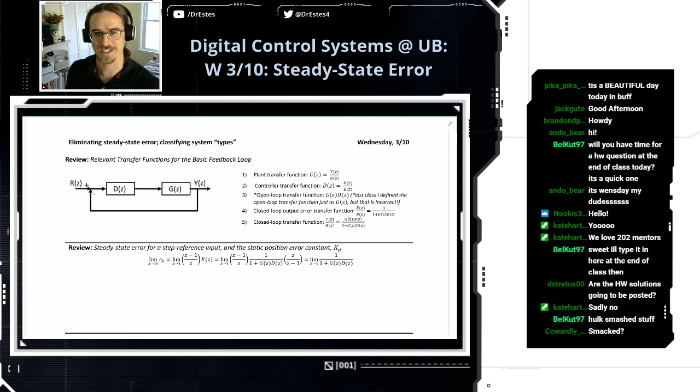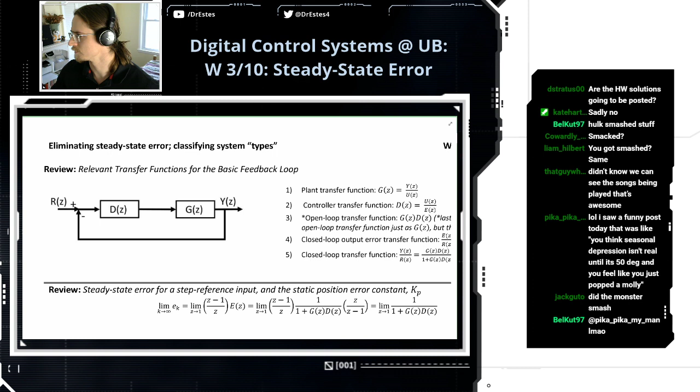I do appreciate you guys. Alright. I saw a funny post today that was like, you think seasonal depression isn't real until it's 50 degrees and you feel like... yeah, you can tell, like, just the sun coming out, it makes a huge difference for your mood. Oh my gosh, it's true. Is this the same sheet from Monday? It's different, the top of it is the same, but it's gonna change. Literally, I'm out there like a dog sniffing the wind.

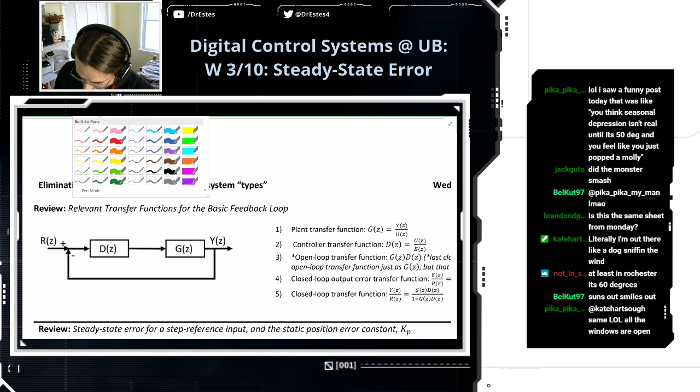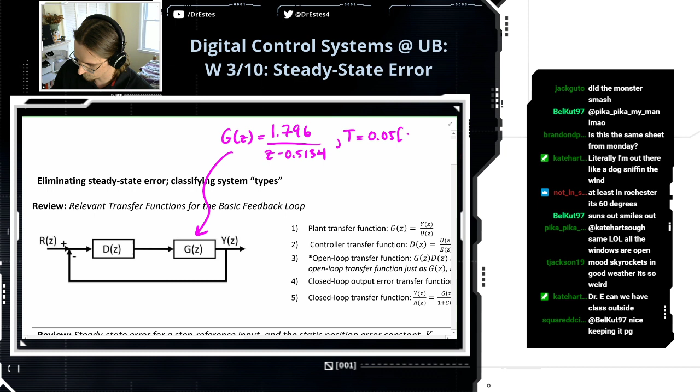Okay, let's review a little bit to catch up on where we are. So we're doing control of a DC motor, and we have our feedback diagram, and this is our model for the motor. This is our transfer function in the Z domain. A transfer function in the Z domain, you have to give the associated sample period with it. And then we came up with a controller that eliminates steady state error. It looks like this: it's got a control gain in the numerator, and then Z minus 1 in the denominator.

Ando says, I just realized I can open my window. It's such a nice day out there.

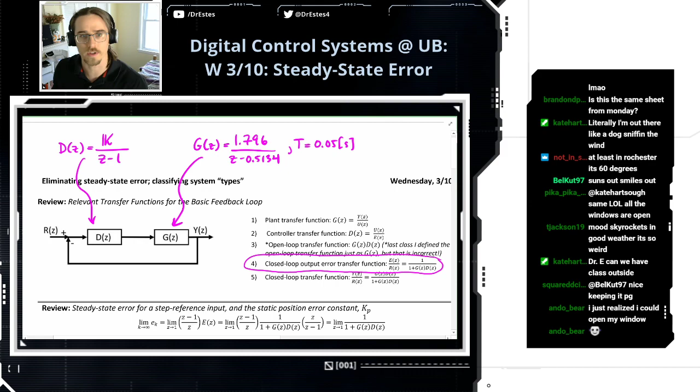Okay, and just to summarize, if you look at transfer function number 4 here, it's called the closed loop output error transfer function. Basically, it's about the dynamics of our error over time. And what we found out is this, and this is how we came up with our controller. But if the product G of Z and D of Z, so this is called our open loop transfer function, if this has a pole at Z equals 1, the steady state error for a step reference is going to be 0.

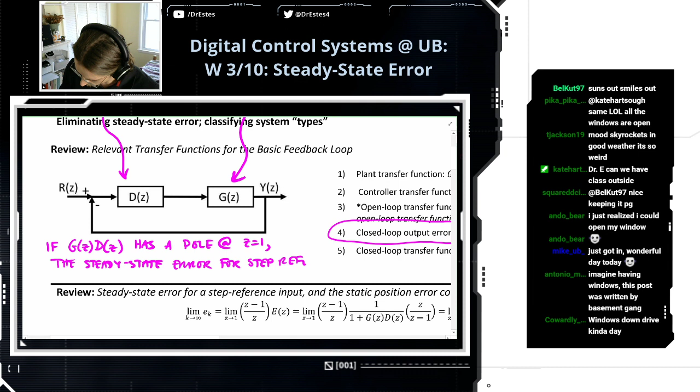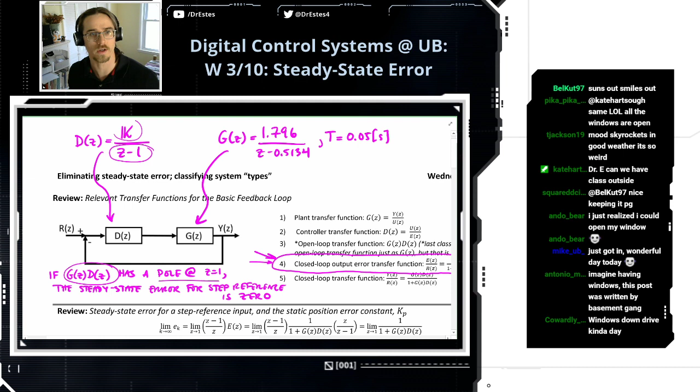So we found this out by applying the final value theorem to transfer function number 4 over here. So we came up with this result: we have to have a pole at z equals 1. So the open loop transfer function has to have a pole at z equals 1. The way we did that is we took our controller transfer function and we just added a pole at z equals 1. Alright.

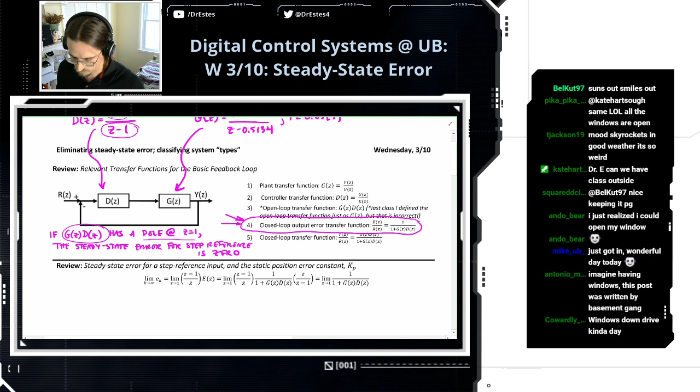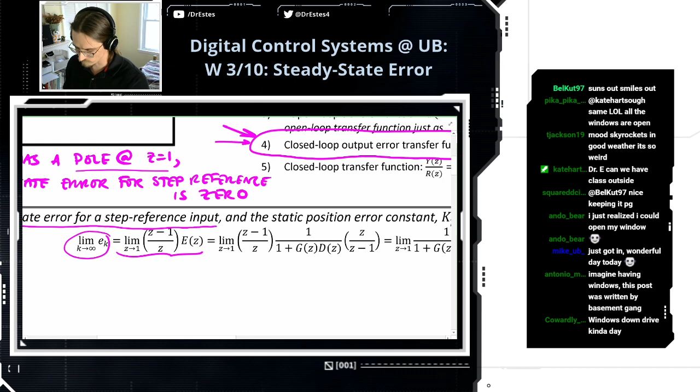Okay, just a little more review here. Let's show how this mathematically happens. So right here is the steady state error for a step reference. This is the limit of the error as k goes to infinity. This right here is just final value theorem. And if you follow through the math, you get this: the limit of z approaches 1 over here. And we made a definition just to kind of simplify this.

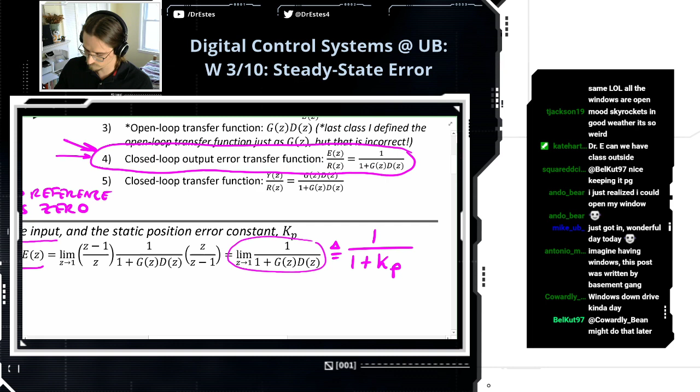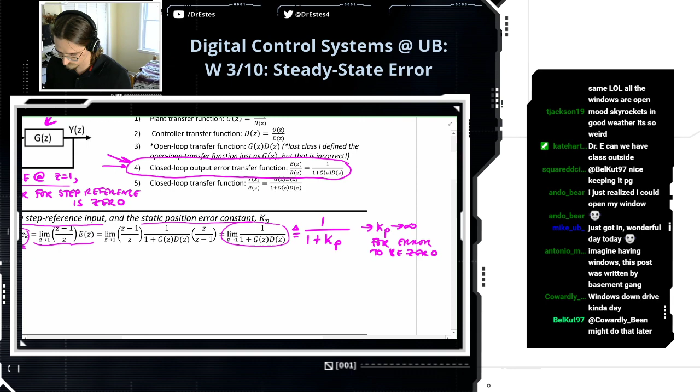So we call this 1 over 1 plus kp. Kp is called the static position error constant. And if this expression is equal to our steady state error, if we want the error to go to 0, then kp has to go to infinity. And if you compare these two expressions right here, kp is the limit as z approaches 1 of g of z times d of z.

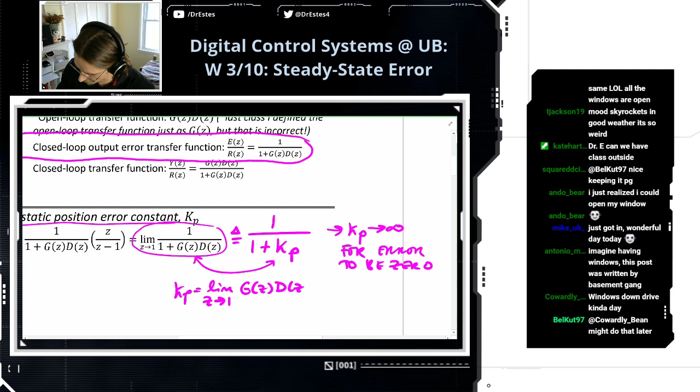So why don't we calculate this for our motor and just demonstrate once again that this goes to infinity. So we're going to say kp is the limit as z approaches 1 of g of z times d of z, which is, this is g of z, 1.746 over z minus 0.5134. And then this is our controller d of z. And you can see here, if I plug in 1 right here, that denominator is going to go to 0. And this is indeed going to go to infinity.

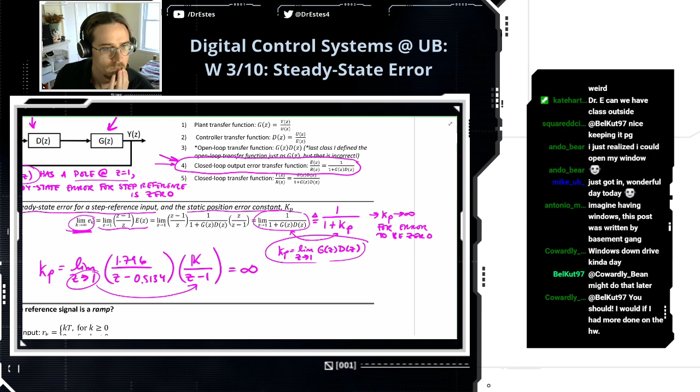Okay, so where we left off, we added this controller and picked a gain. I think I liked this one, I can't remember.

Let's plug it in and take a peek at it, and then we're going to try another type of reference signal. We're going to try a ramp.

Okay, it's the mega. Get the port correct. Upload this.

Wait, is everything plugged in? What's going on?

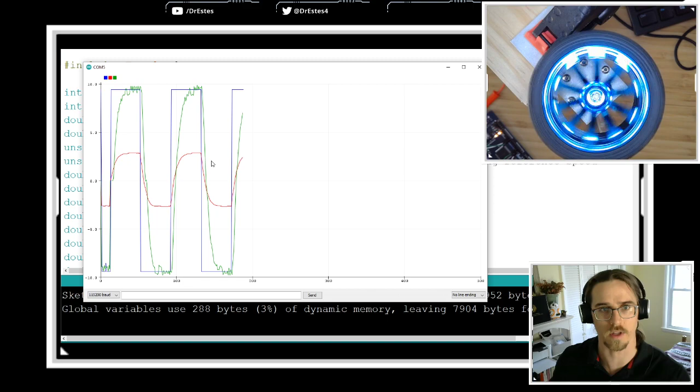Okay, so the green line is the angular velocity of the motor. The blue line is the reference angular velocity. So this controller is giving us zero steady state error.

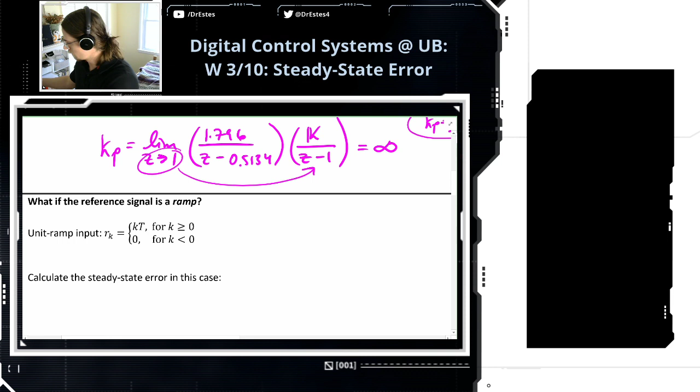Okay, so now what if the reference signal is a ramp? This is what a unit ramp input is defined as: it's k times t for k greater than or equal to 0, and it's 0 before.

Loose connections are the main cause of the biggest headaches in the entire universe. Yes, I agree, especially today.

Okay, so we're going to plot r of k as a function of k, at k equals 0, 1, 2, 3. So at 0, r of k is going to be 0. At k equals 1, r of k is going to be t, because it's k times t. And then at k equals 2, we're going to be at 2t, and it just goes on in this linear fashion, and that's why we call it a ramp.

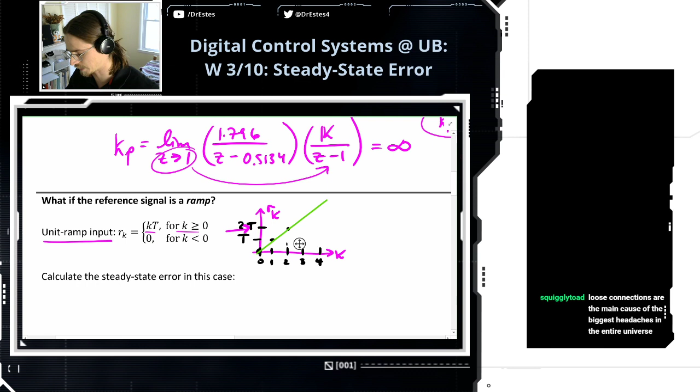So this is the reference we're going to try next, and we're going to try to look at the error as we're tracking this ramp.

So let's draw what our motor is most likely going to do if it works. It's going to try to track the green line. But if there's some steady state error, it'll never totally catch up with it. Our goal is to precisely follow that green line, but spoiler, we're going to have a little bit of error. But we're going to talk about how you could get rid of it as well.

Forgive me. I forgive you, T. Jackson, I forgive you. But what are the effects of choosing a different gain?

The effect of choosing a different gain moves around the closed loop poles. Actually, I'll pull this up really quick.

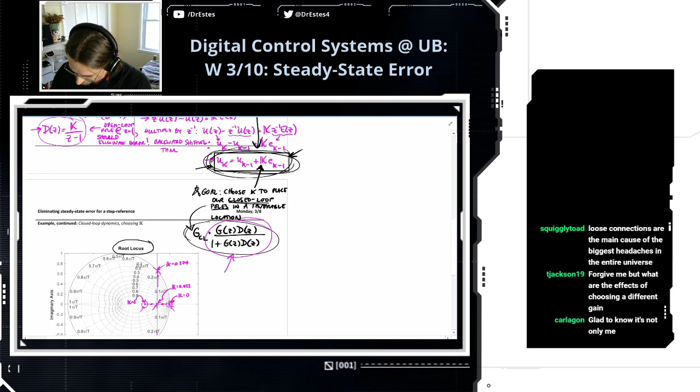So what we did at the end of last class is a root locus plot, showing where the closed loop poles for your system go as you change the gain, k. When the gain was 0, we had 2 poles, one here and the other one here. When we chose the gain to be 0.033, both of our poles coincide right here on the real axis. So changing your gain moves around the poles, and depending on their location, you can have overshoot, different settling times, whatever. So that's what that does.

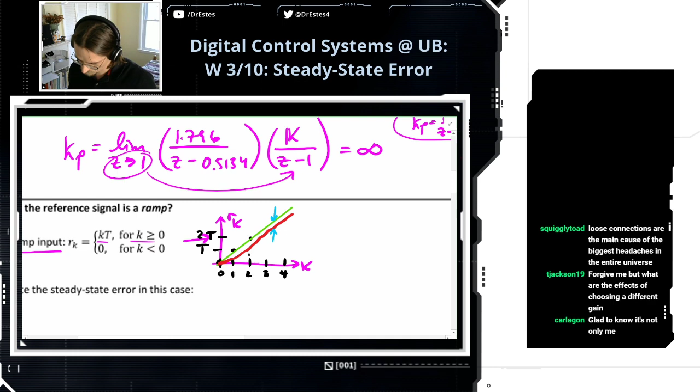Okay, so we're going to need to take the z transform of this ramp input, because we're going to use the final value theorem. So if I take the z transform of this ramp, this is what you get: it's t times z over z minus 1 squared. So we're going to use this in a second.

All right, so now we're going to calculate the steady state error. The steady state error is the limit as k goes to infinity of our error, ek. And this is the final value theorem right here, which just says that you can calculate this error by taking the limit as z goes to 1 of z minus 1 over z times your error in the z domain.

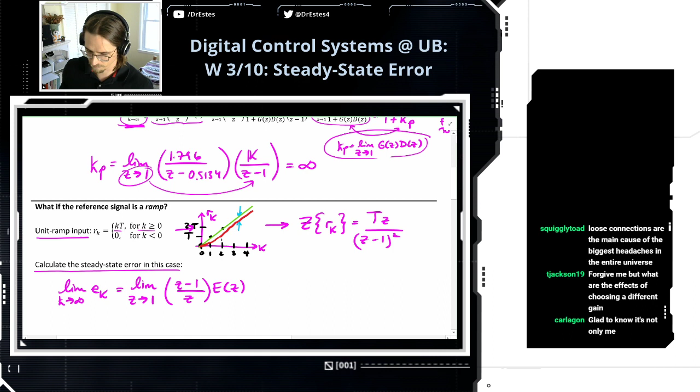Okay, so we'll keep working this out. The limit as z goes to 1 of z minus 1 over z. So our error in the z domain, we're going to use our transfer function number 4 up here.

Up there, which you can't really see. But it's e of z over r of z is 1 over 1 plus g of z d of z. Actually, I'm just going to write it like this first: we're going to take that transfer function, and then we're going to multiply it by r of z.

And this is r of z, by the way—the z transform of our input. That transform is from last week when we were doing some magic, right? Yes, that's correct. That's just one that we're going to use, and its origins are magical.

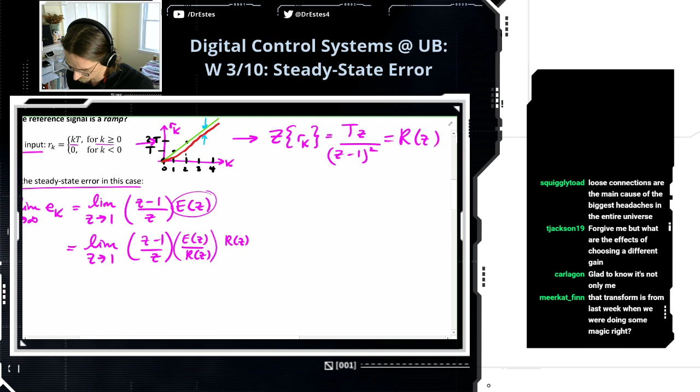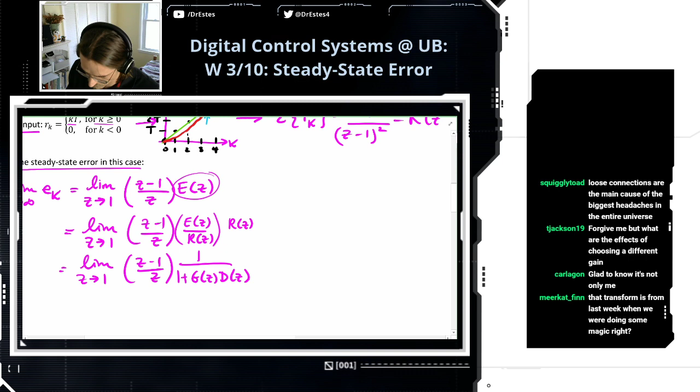So let's keep writing this thing. E of z over r of z is 1 over 1 plus g of z d of z. And then for r of z, we're going to substitute tz over z minus 1 squared. Some things are going to cancel out here, fortunately, like this z can cancel with this z, and this z minus 1 can cancel with one of these z minus 1s, because that's a z minus 1 squared. And then we're left with 1 over 1 plus g of z d of z times t over z minus 1.

Here we're going to introduce another definition. This, by definition, is equal to 1 over kv. So that just means, if you examine those two lines, kv must be equal to the limit as z approaches 1 of 1 plus g of z d of z, times z minus 1 over t. We just define this term to simplify this expression a little bit, so we don't have to write the whole thing out all the time. We'll just write it as 1 over kv.

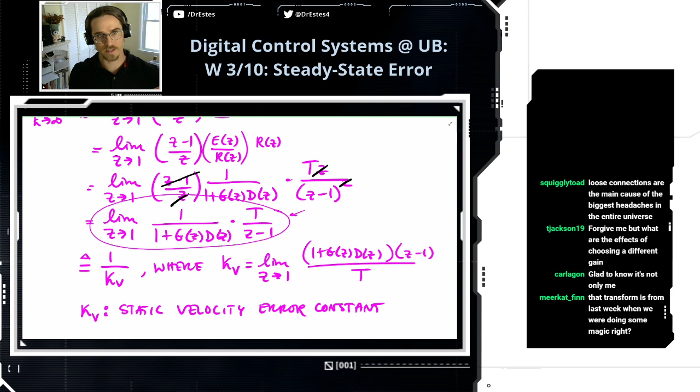So we're actually going to have multiple types of performance constraints that we work with, like settling time, overshoot, rise time—those are called transient performance specifications. But these static velocity, static position constraints have to do with the error as time goes to infinity. So we call those steady state performance constraints.

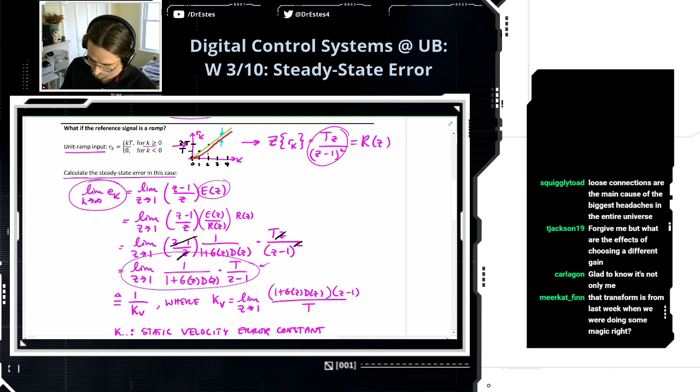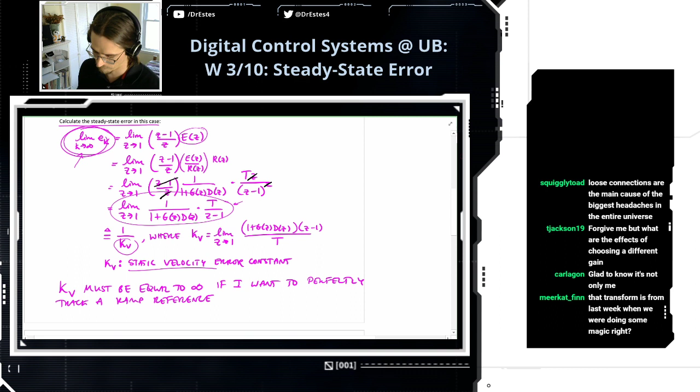Okay, so we'll just point out one thing here. If I'm trying to track a ramp reference like this, and if I want the error to go to 0, so if I want to finally line up with that green line, then kV must be equal to infinity if I want to perfectly track a ramp reference, because the error is equal to 1 over kv. So if I want the error to go to 0, I need to be dividing by infinity to drive that to 0. And this is going to be pretty easy to remember because remember, kp must be infinite to perfectly track a step reference—at least at steady state. Like at steady state you approach, you have 0 error.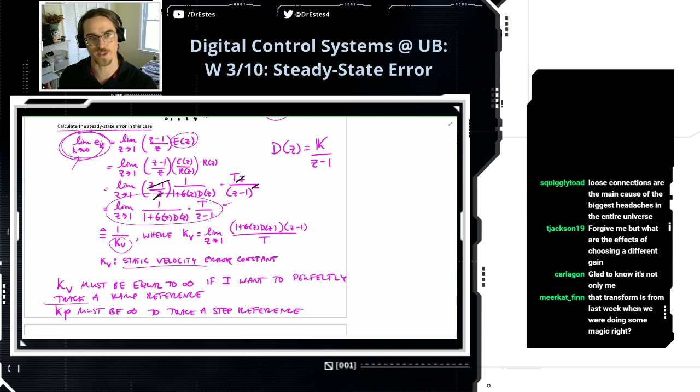Okay, so what I want to do right now is use our existing controller for the DC motor, which is this: d of z is just k over z minus 1. That's what we're working with right now. I want to calculate what the steady state error for a ramp reference is going to be, and then we're going to go over to the actual hardware and see if the error that we predict using math is what actually happens in real life. And I think it should be pretty close in this case.

So, okay, what we're going to do: let's calculate the limit of the error for tracking a ramp reference for our current controller. So d of z is k over z minus 1. And the way we're going to do this is I know that the limit of the error is 1 over kv. So we're going to calculate kv, do 1 divided by whatever that is, and see what the error should be. So kv is 1 plus g of z d of z, times z minus 1 over t, the limit as z goes to 1.

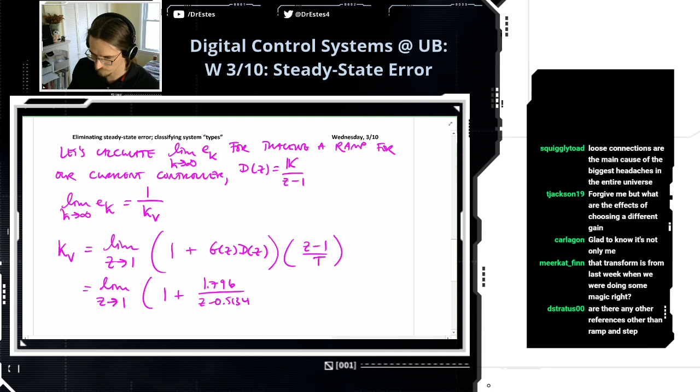All right, so let's start plugging stuff in because we know what g of z and d of z are. So it's 1 plus 1.796 z minus 0.5134—let's fix that 9—times k over z minus 1, times z minus 1 over t.

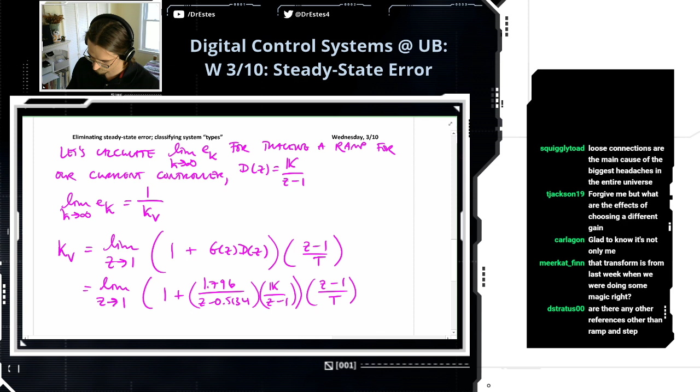Are there any other references other than ramp and step? Yes, really a reference can be anything. It can be some really bizarre function, could just be random noise. It could be a sinusoid too, that's another really typical one.

But the reason we have something like a step and a ramp is that you could think of these as Lego pieces that you can build more complex references with. So if you know how your controller performs with a step and a ramp, you might have some idea of how it will perform with something more complex built from steps and ramps and so on.

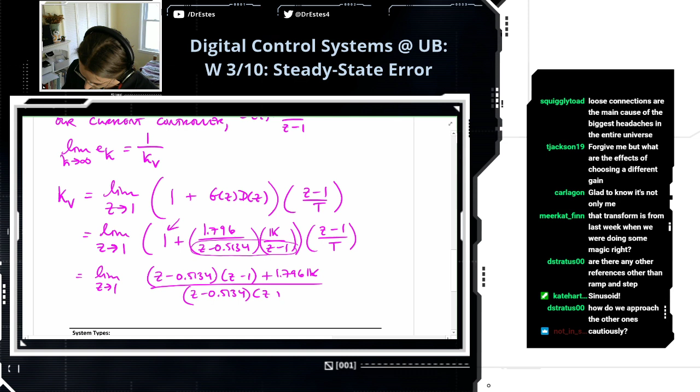What I'm going to do is turn this 1 into the ratio of z. I'm going to make it z minus 0.5134 times z minus 1, divided by that same thing. So we're going to end up with z minus 0.5134, z minus 1, plus 1.796k, divided by z minus 0.5134, z minus 1, times z minus 1 over t.

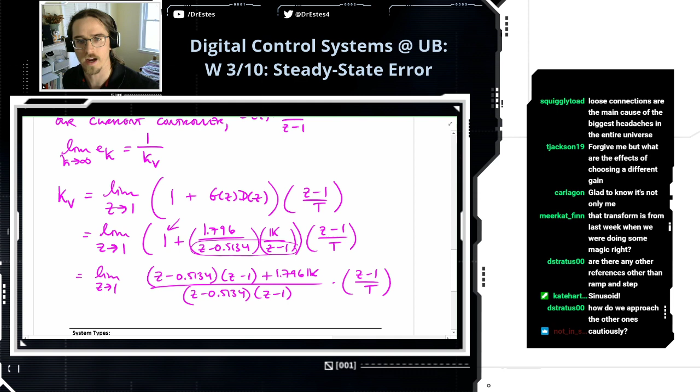How do we approach the other ones? Cautiously - that's good advice, we'll get to it. Patience, D Stratus.

Notice these z minus 1's are going to cancel. Then if I take the limit as z approaches 1 and plug it in here, I'm going to have 1 minus 1, which is 0, so this whole term is going to go to 0. And it's going to be 1.796k divided by 1 minus 0.5134 - plugging in 1 for z down there. And then I'm going to multiply this by 1 over t.

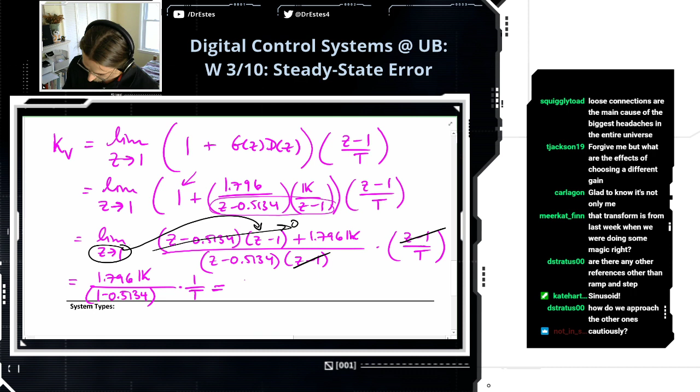And the gain that we chose right now for our controller - we can always change it - is 0.033.

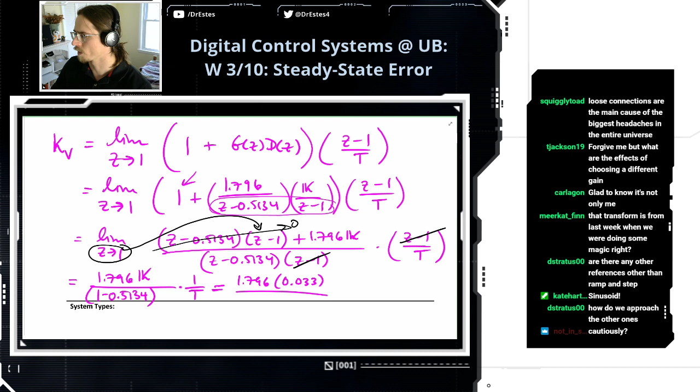Let's calculate this: 1.796 times 0.033, divided by 1 minus 0.5134. I probably have too many parentheses here, you probably don't need this many. And then I've got to divide by t, 0.05. So this is our kV.

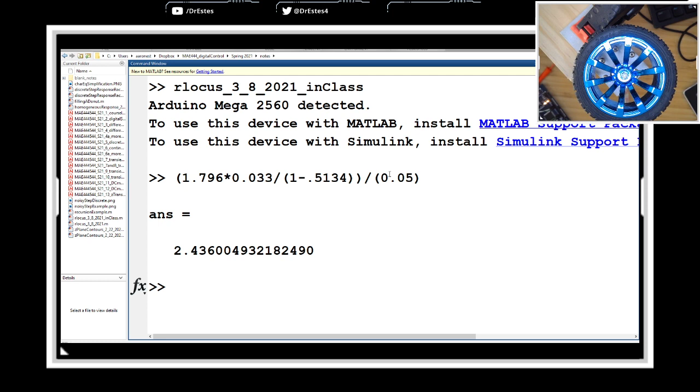2.436. And then our error, our steady state error, is going to be 1 divided by this - 0.41 radians per second, I guess. So kV is 2.436.

I just put a dot dot dot in the numerator here, but it's just continuing this. And so the limit as k approaches infinity of our error when we have a ramp is 1 over 2.436, which is 0.4105 radians per second.

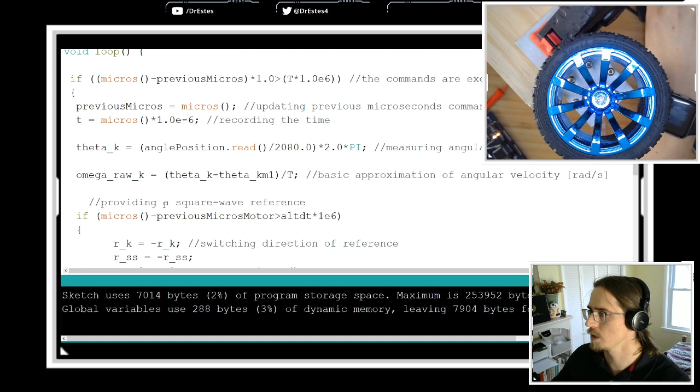Now let's go to the Arduino. Let's input a ramp input. We're going to have to build this code on the fly here. I don't think it'll be too crazy. I think I have a ramp input code hanging around, but okay.

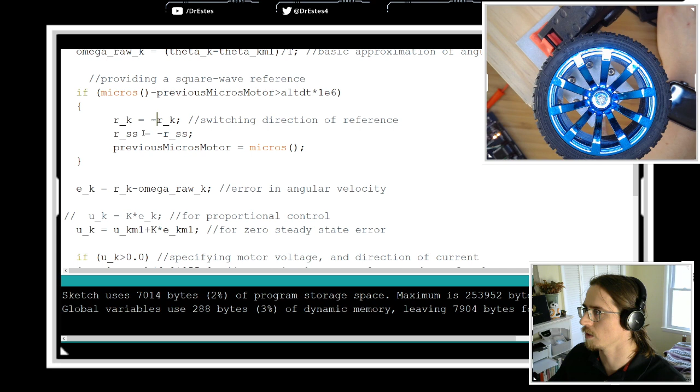What we're going to do is copy this, comment it, and now make it a unit ramp reference. We're going to make it right here, we're going to say RK... wait a second.

So every time we go into this loop, we're going to do this first: RK needs to increase by t radians per second each time. So this will start at 0 - we're going to start at 0. Up at the top of the code, our reference is going to start at 0 angular velocity.

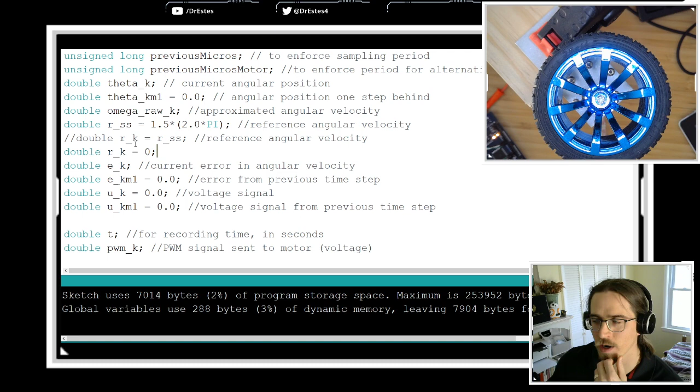And then, I kind of want to make a triangle wave out of this, because if I just have the reference increasing always in the code, it's going to get pretty quick. Heck, let's just run it first. We might turn it into a triangle later, but I think this will do what I want it to do.

And this is the same controller. Okay, we got to try this. And remember, when we're looking at this - wait, wrong one - we want to see if the error approaches 0.41 radians per second. So you should be looking at the difference between these lines.

Okay, come on, and what are we plotting? We're plotting - oh, I want to plot r_k. So this is going to keep going up. This is going to be our voltage, and this is going to be our angular velocity. Let us do it, come on. And if it doesn't work, we're going to blame it on that guy who doesn't stink.

Okay, let's plug this in. Okay, so it's starting - the blue is the reference.

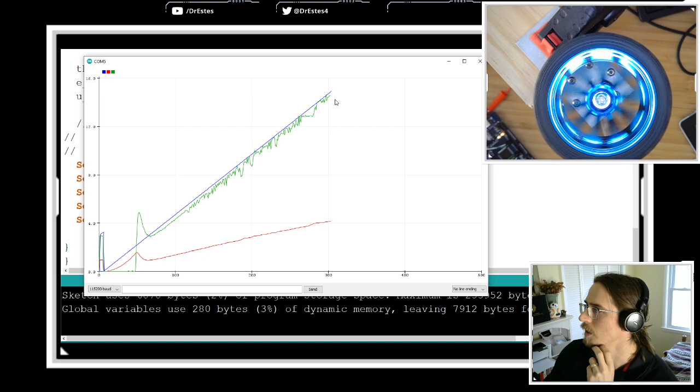We're going to reach maximum speed here in a little bit. This is the voltage, by the way. The voltage source only goes up to 6 volts. Wait, what the...

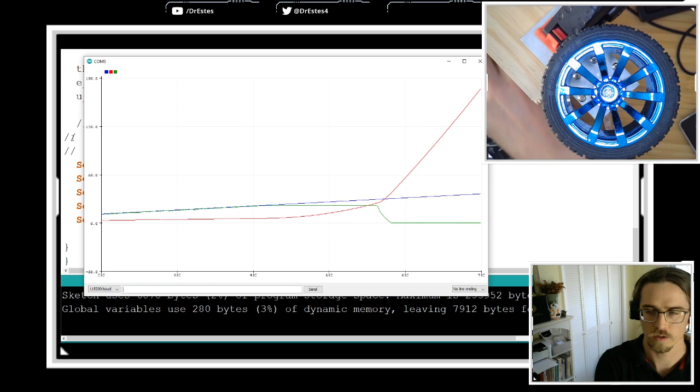Okay, so we reached terminal velocity here. Let's do that again, but look at... what is going on? Let's look at the serial monitor view this time, so we're just going to look at some numbers.

Okay, so the first column is the reference angular velocity in radians per second, and this is the actual angular velocity.

Wait, I have an idea. Okay, let's stop this. What I want to do is copy this data, and then I'm going to load it. Does the serial plotter have a legend?

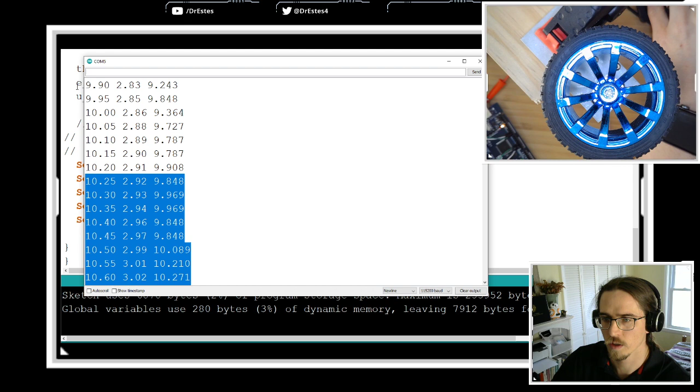It does look like they're within 0.4. I think you're right - first column minus third column.

Wait, text, Notepad. Let's save this as our ramp test. Ramp test, 3/10/2021. Wheel falls off - yeah, we were kind of pushing it to the limit there.

Wait, okay, so I want to say data is load ramp test, 3/10/2021.txt. And then the first column is going to be the reference, and the third column is going to be the actual output. And then I have to save this in the same folder.

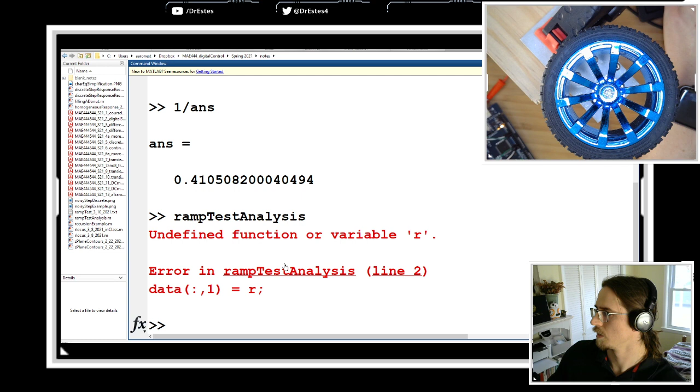Ramp test analysis. I think this is in the same folder. Wait, is it? Oh, what? I'm a... okay.

Okay, what I want to do is plot this, and I want to do like the error is r minus y. And how about we plot...

Oh wait, T... oh wait, this is the third... T is the second column, right? Or no, that was voltage. Okay, T... N is length R. T is 0 with 0.05 second increments up to n minus 1, times 0.05. So I should be able to plot T, R, T, Y.

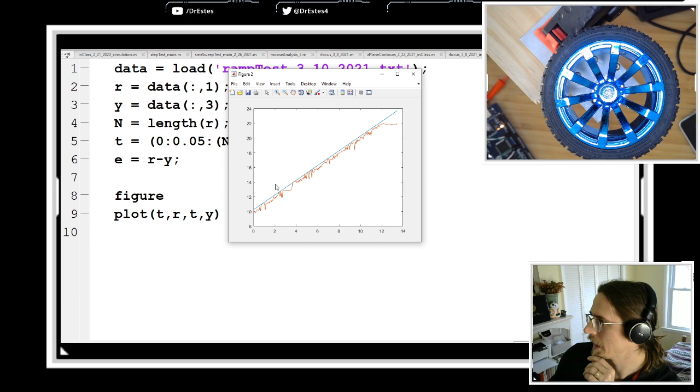Let's try. Oh, here it is, here it is. Now... Let's plot the error.

Okay, what if we take the mean of the error? It looks like after 12 seconds here it was kind of getting out of control. So what I'm going to do is take the mean of the error, but for indices where t is less than 12. Is that going to work?

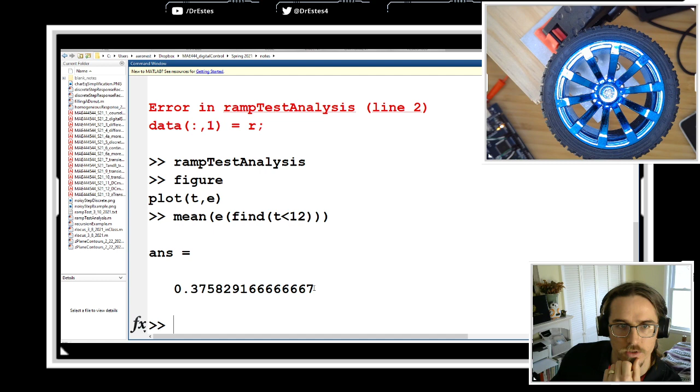Let's just run it, I don't know if the syntax is right. 0.37 - so that's like the mean value of the error. Wait, does that make... I guess it is, like if you zoom in here.

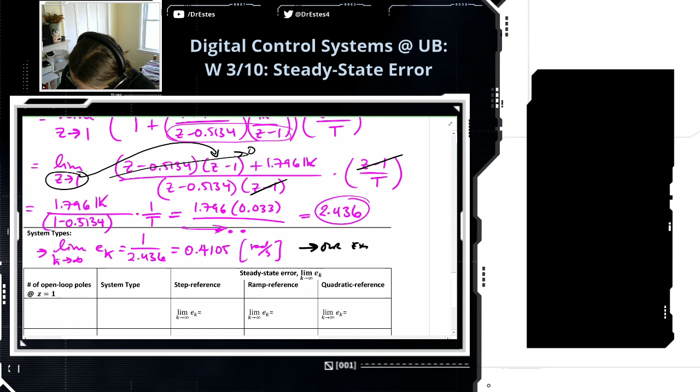All right, what did we calculate the error was going to be? 0.41 radians per second. Hey, I'm pretty happy. Our experiment has, let's just say like the mean of the error is like 0.38. So pretty close, and the signal was pretty noisy anyways.

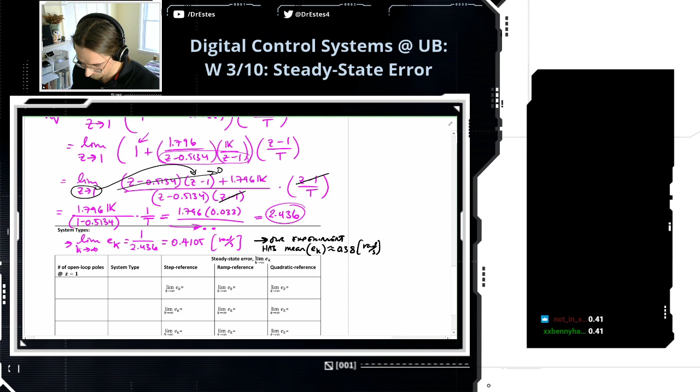So let me ask you this - this is not an easy question. But how can I revise my controller to make the error go to 0? That's my question to you.

And I think maybe - so we listed a condition before that KV must be infinite, right? In order for the error to be 0, because the error is 1 divided by KV. But if you look like 3 lines down here, what did we need here for this to go to infinity? What would we have needed?

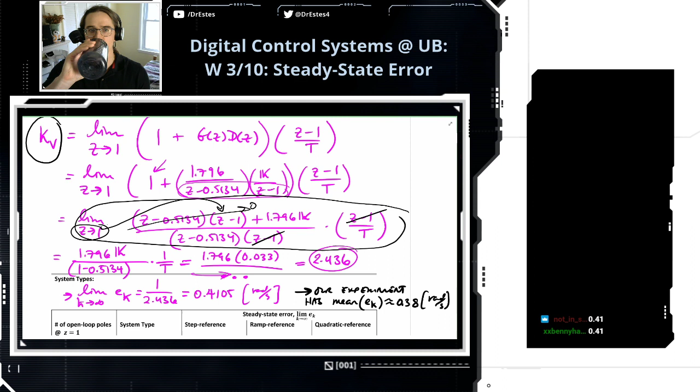Add another pole at z equals 1. Yes, you guys are exactly right. If you added - because this is the limit as z goes to 1 - if we could have just had another magical z minus 1 here, the error would go to... I want to go to negative. Don't say that.

Okay, so if we had that. So if we just - a very quick way to maybe do this, kind of like what we did last time - what if we revise d of z so that it's like a gain, but then we have z minus 1 times z minus 1? Don't say the number who shall not be named.

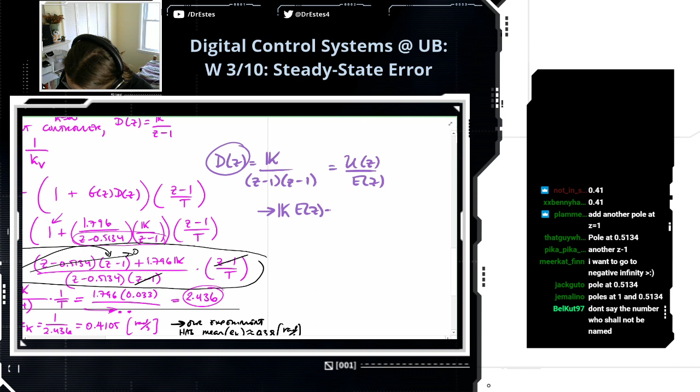And I haven't played around with this yet, but remember, d of z is u of z over e of z. So this would be k times e of z is u of z, z minus 1, z minus 1. U of z, z squared minus 2z plus 1, right? Chat should ban the phrase negative infinity.

So what I'm trying to do right here is make a difference equation, because I want to see how I would have to revise my code to implement a controller like this.

So this would be z squared u of z minus 2z u of z plus u of z. So k times e of z is equal to this.

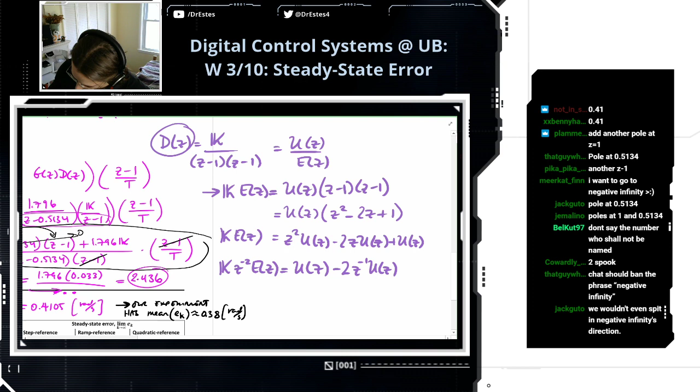And then I want to use the backward shifting theorem. So I'm going to multiply both sides by z to the minus 2. That gives k z to the minus 2 e of z equals u of z minus 2z minus 1 u of z plus z minus 2 u of z.

If we bring this back into the difference equation domain using the backward shifting theorem, I would have k times e k minus 2, so you need the error from 2 time steps prior. Then this term is just going to be uk, this is minus 2 uk minus 1, and this one's plus uk minus 2.

So here's going to be my revised line of code for this controller. U of k is equal to 2 uk minus 1 plus... oh wait, I need a plus sign here. Why did that last value go negative? Okay, thank you, that's right. So this has to be minus uk minus 2, plus k times ek minus 2.

All right, maybe we'll come back to this. You'd have to do a root locus analysis to pick what that gain k should be, because if you just throw some number in there, you might have an unstable system. You have to look at where the roots would end up in the z-plane. But I want to show you this to illustrate the line of reasoning we use when coming up with control laws. This is an example of: if I want zero steady state error on my ramp, what do I practically need to do? I know I need to add another pole here, and then you just follow the math and it gives you your line of code.

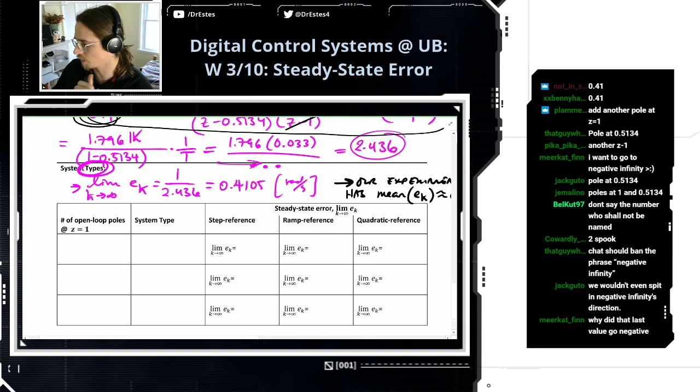Okay, so before we do anything with that, I want to come to this table and we're going to talk about system types, because this is lingo that you have to know for controls engineering. This has to do with classifying what kind of steady state error you're going to expect for a given system, and it has to do with the number of open loop poles at z equals 1.

So the first system type is system type 0, and then we're going to do system type 1 and system type 2. I guess you could even go to type 3, 4, whatever, but typically we stop here. It's easy to remember because the system type just goes back to the number of open loop poles at z equals 1. So a system type of 0 has 0 open loop poles at z equals 1.

Remember the open loop transfer function is g of z times d of z. So if I have a model for my plant g of z, and somebody tells me this is the controller I'm using, d of z, you could look at their function and ask how many open loop poles do you have at z equals 1. If they don't have any, the system type is 0. If they have 1, the system type is 1. If they have 2, the system type is 2.

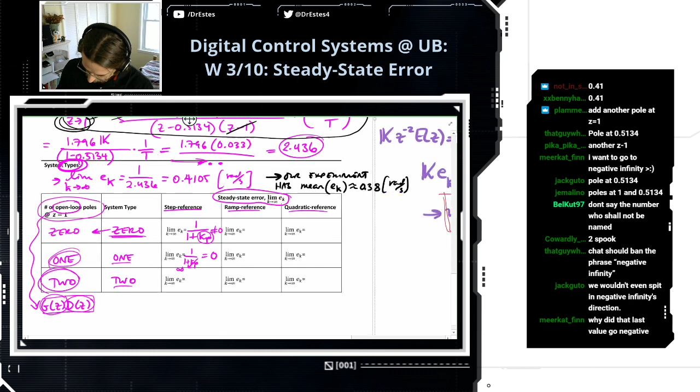So this will also have 0 steady state error for a step. If you have a type 1 or higher system, it'll have 0 steady state error for a step reference. What about a ramp?

We showed a type 1 system, like our formula is 1 over kV. And this wasn't equal to 0 — it was equal to like 0.4 radians per second for our system. But if we made our system type 2, kV would have evaluated to infinity, and it would be equal to 0.

If you have a type 0 system and you give it a ramp reference, the error is infinite, because with a type 0 system you're going to have a ramp that looks like this, and you fall farther and farther behind. As the steps go to infinity, that difference just keeps growing, so we say the error is infinite.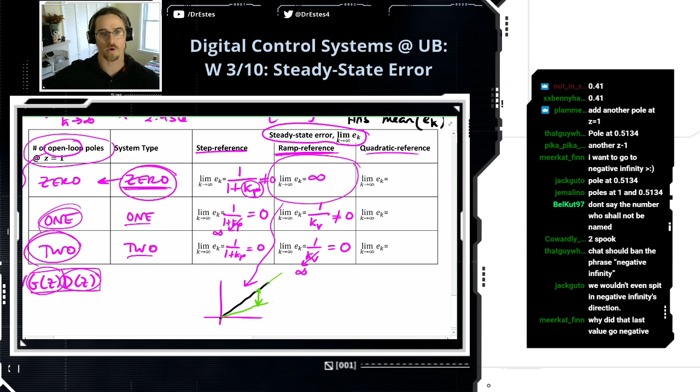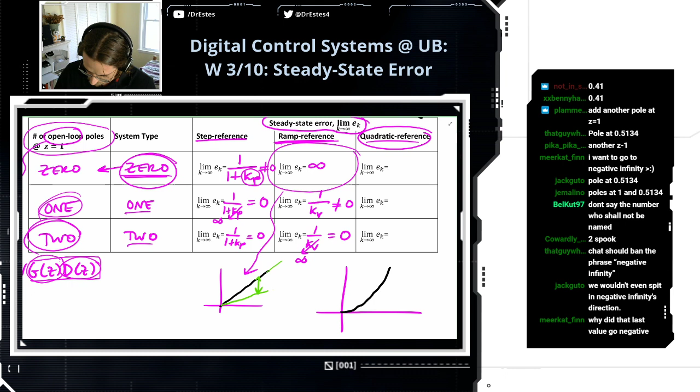Okay, let's finish up this column — quadratic reference. A quadratic reference is, instead of linear, it's like an x squared kind of relationship, and you're trying to track this. If you have a type 0 system trying to track this, the same thing's going to happen — you're going to fall farther and farther and farther behind. If you have a type 1 system, it's also going to fall farther and farther behind, but it'll do a little bit better. So this is going to be infinite.

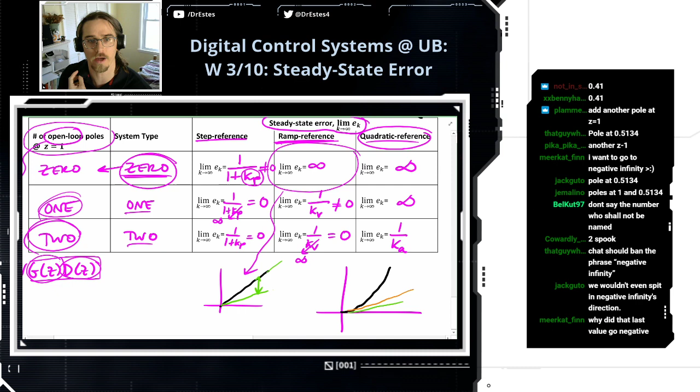If you have a type 2 system and a quadratic reference, there's actually a k sub a, which is called the static acceleration error constant. You would follow this and you would converge to some constant gap in between.

So when you think of system types, the higher the system type is, like 2, 3, whatever, you could think of your controller as being more agile. It's able to track faster changing references.

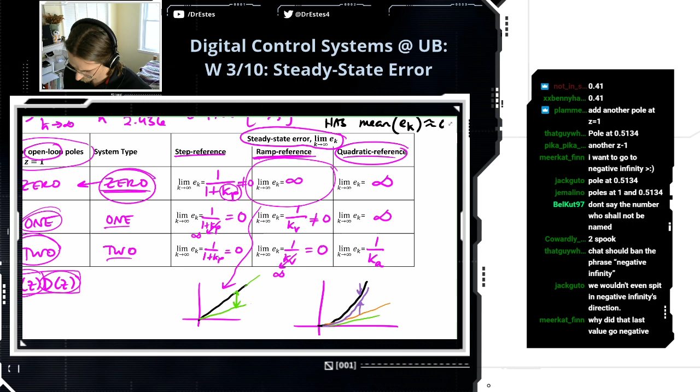Type is same as order? No. Type is not the same as the order of the system. The system type, the simplest definition, is the number of open loop poles at z equals 1. So this is totally independent of the system order. So system type is this.

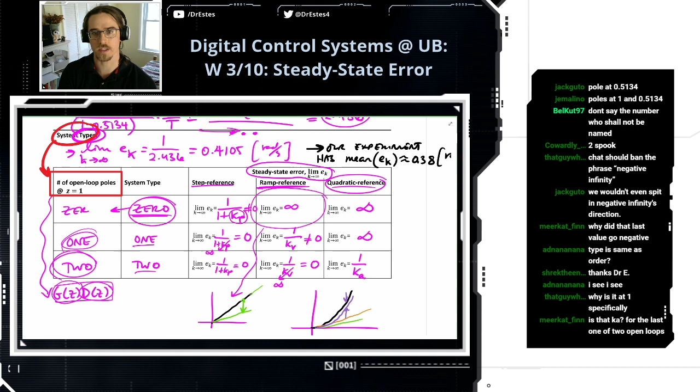Because you could have a high order system that doesn't have any open loop poles at z equals 1, and it might actually have terrible steady state error. Why is it at 1 specifically? Well, to show that, you have to go back — last time we did a little proof. Is that Ka for the last? Yes, this is Ka.

It's kind of like you have Kp, the static position error constant, Kv, the static velocity error constant, and Ka, the static acceleration error constant. We're mainly going to stick with these two in this class.

What are the downsides to a large number of open loop poles at z equals 1? There's one downside. This is not a huge downside, but this depends on information from 2 time steps prior.

What's being said is that you have to store more and more variables on your microcontroller. Like if I had a type 3 system, then this is going to depend on error 3 time steps prior, and so on and so on. But that's not like a huge detriment.

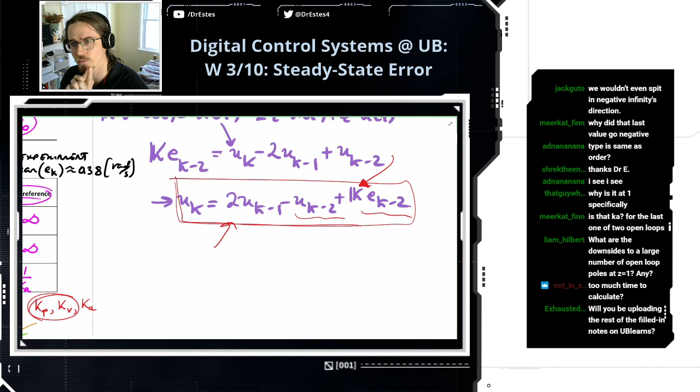Okay, BelKut has a homework question. On homework 3, how much percent error are you looking for when considering overshoot? Also, what are some things you were looking for in the brief justification? I know people have been mentioning in the Discord, and I've gotten some emails, that the rise time error — they're getting errors like 10, 20 percent. I was getting the same error. Right now I don't have the best explanation for that, and I'm still looking into it. My gut tells me if you increase the sampling frequency — the sampling frequency we're dealing with is pretty slow here.

I think if you increase the sampling frequency, the error would decrease, but it doesn't really... I kind of thought that it would be independent of the sampling frequency, how well it does with rise time. Overshoot — you might encounter a similar amount of error, but I feel like that should be a little bit closer. You didn't get rise time error, just overshoot error? Okay.

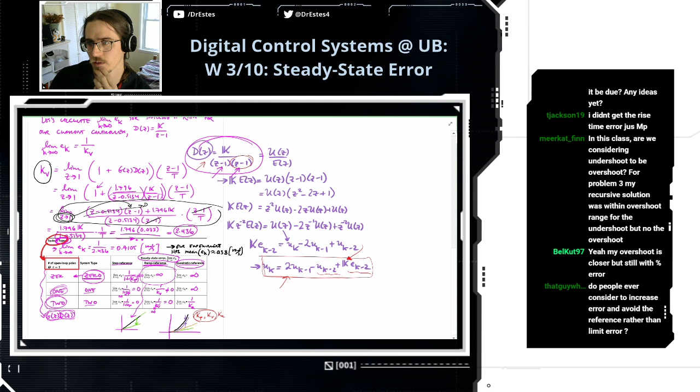Oh, I think I see what you're saying. Like trying to create a tag problem where maybe you're always trying to stay as far away as possible from something. That's interesting. I bet there's some application for that, which I haven't really thought about.

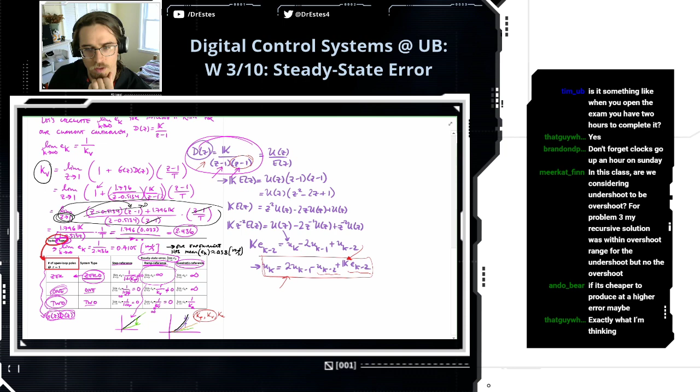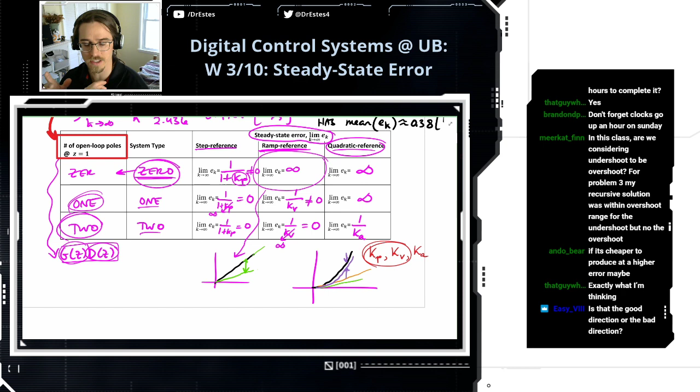Exactly what I'm thinking. You could use these same principles, but that wouldn't really work with this, because if you're trying to be agile yourself in avoiding something, the error we're talking about here is happening because your controller basically isn't agile enough. So if you were really trying to make a device that can play keep away or something, you might want to maximize error, but you'd do it in a different way than what we're seeing here.

In this class, we're considering undershoot to be overshoot. For problem 3, my recursive solution was within range for the undershoot, but no overshoot. Yeah, because for this homework, I made it so that we're just looking at the homogeneous solution starting at 1, so it's just going to go down and undershoot. That's what you should be using for checking the overshoot condition, because how much it undershoots in this case is how much it would overshoot if you had a step reference.

It's cheaper to produce at higher error. Yeah, I think generally better performance on a controller is more expensive.

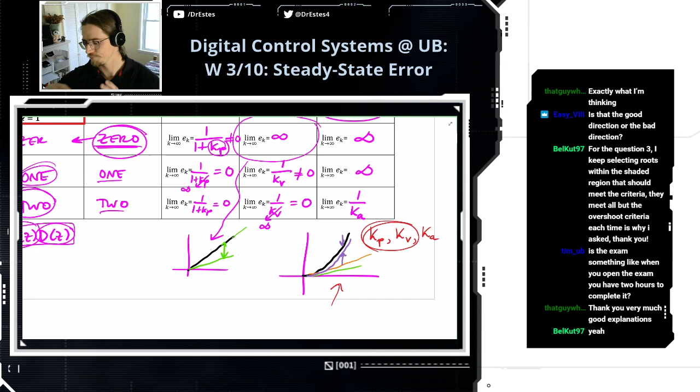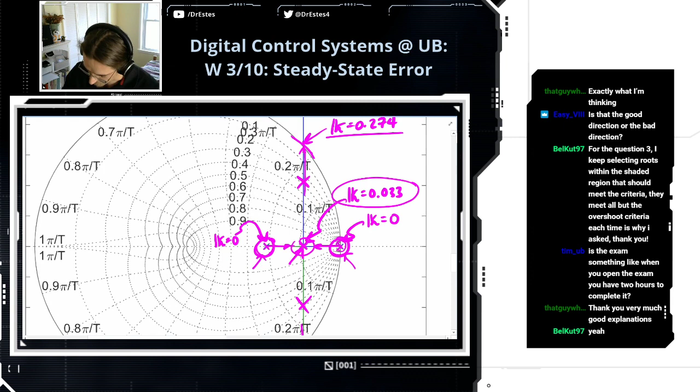Well, think about it. If you have too much overshoot, you can always... what am I saying, let's go back here. Okay, you see these contours, like the ones shaped like a sideways heart? The overshoot gets smaller the more you move towards the center here. So if you have too much overshoot, you can always scoot in a little bit and keep moving a little more towards the center.

For choosing the roots, I know we're able to find the natural frequency and damping ratio from the Z-grid. I'm just confused on how to choose the lowest order system. Yeah, increasing damping reduces overshoot.

Well, when you're talking about the order of a system, we're only looking at first and second order systems. A first order system will have one real root, so it'll be a root on the real axis. A second order system will have a complex conjugate pair, or it could have 2 roots on the real axis. So if you want a first order system, it has to be...

Will there be homework solutions posted before the exam? Yes, it'll definitely be up before the exam.

Second order will be—it could be oscillatory, because the second order can be 2 real roots as well. It doesn't have to be a pair of complex conjugates.

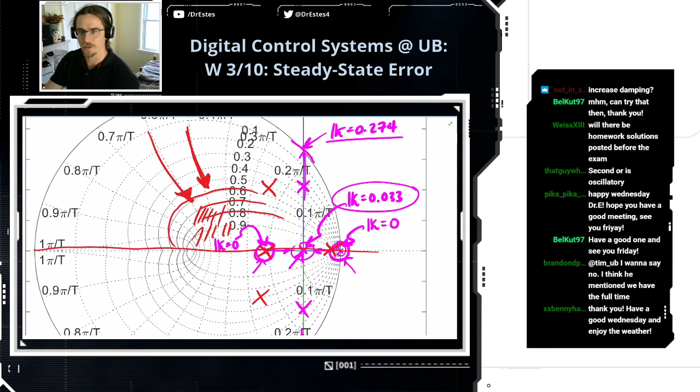Oh wait, is the exam something like when you open it you have 2 hours to complete it? No, I'm going to design it to be like a 1 or 2 hour exam, but you have the full time to work on it. All right, everybody.